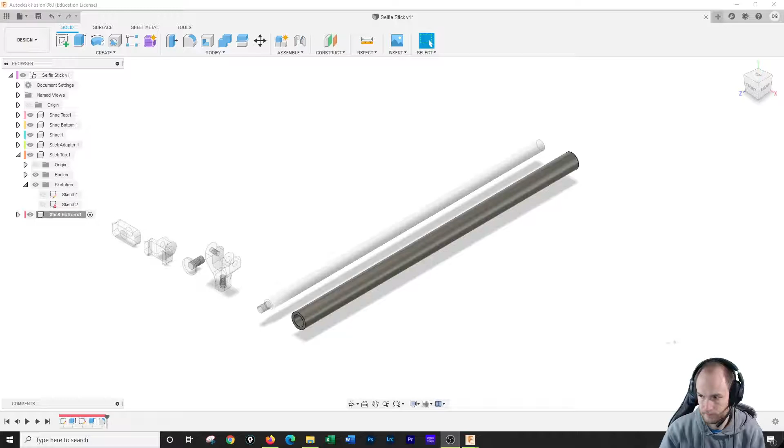Moving down the line, we're going to make the phone holder bottom. We'll make a sketch. So what are we working with here?

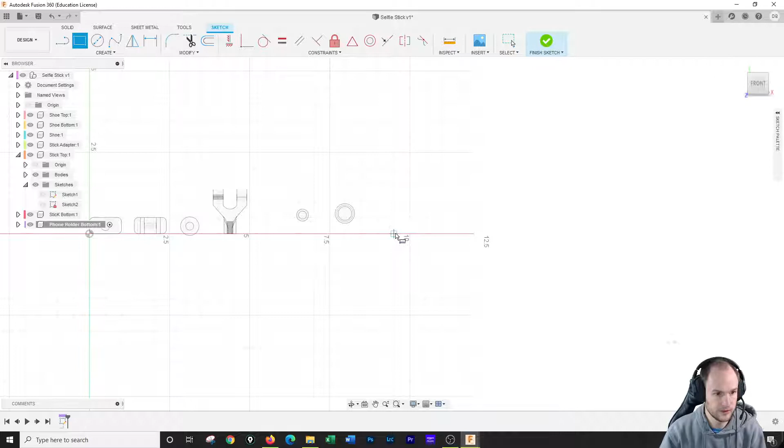So we're gonna make a sketch that is 0.375 by 2. In the plans I had it drawn from the bottom, so it took me a second, and this should be -1. Okay, so that is the first step.

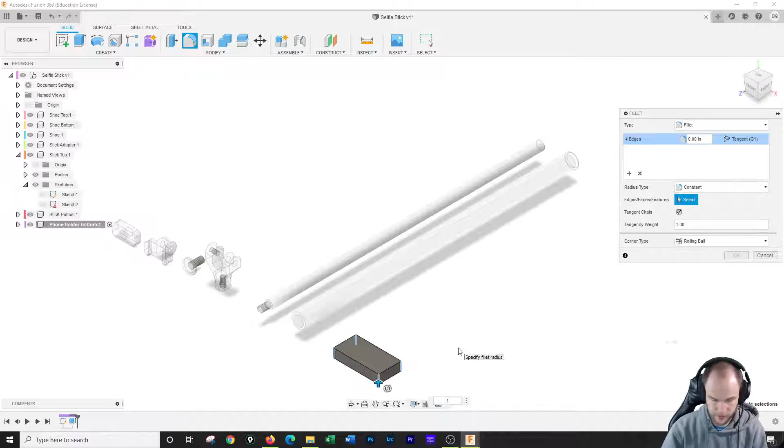I'm gonna throw a quick fillet on these sides here. Whoops, not that side. 1, 2, 3, 4, and it is an 1/8 of an inch fillet, 0.125. Click OK on that.

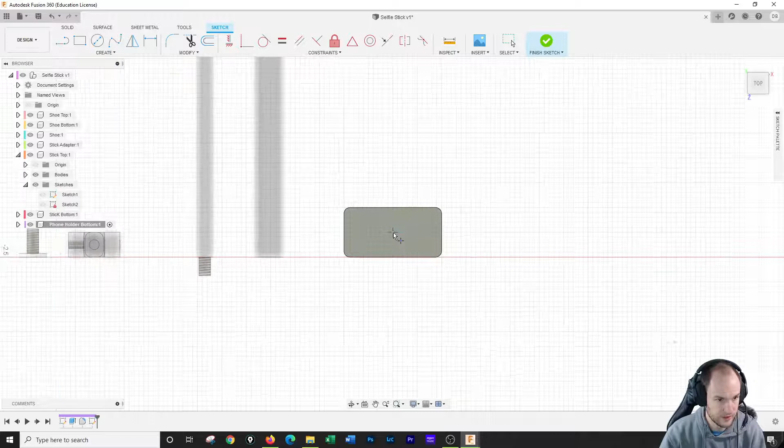I'm going to make a sketch on the top, and in the center of the top I'm going to make a point. So I'm using the lines to line up the center. Found it for me, so you saw that I used this point and that point, the midpoint snaps. So I've got a point in the center, and if there's a point, it means we're probably going to do a hole, so let's do our hole.

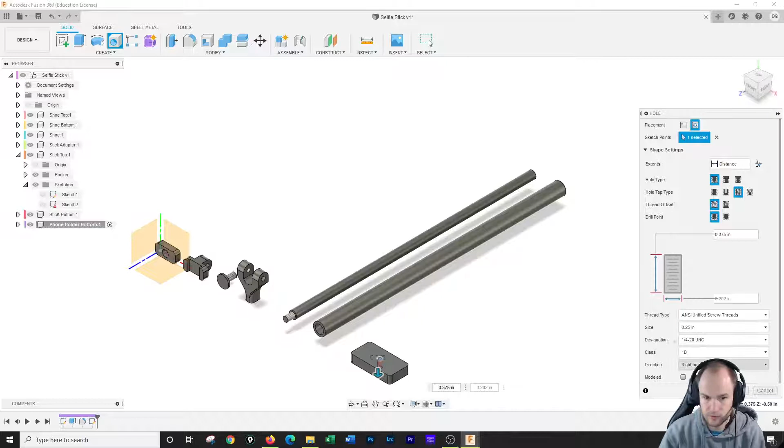And what do we got? Yes, yes, yes, yes. We want this to be at 1/4-20, 1B right hand. Okay, so all that is in order now.

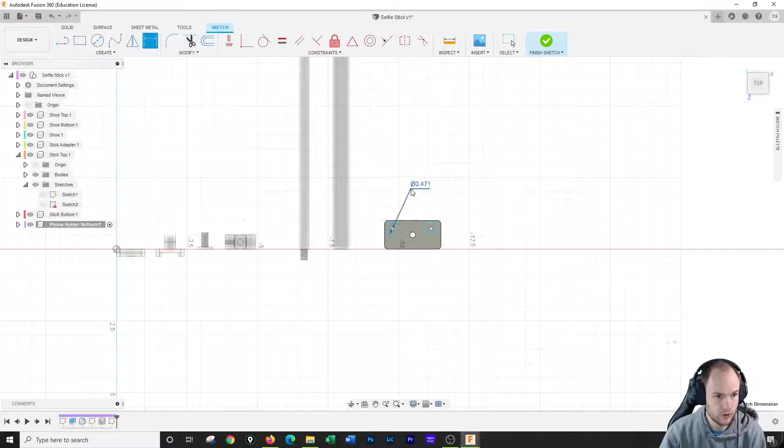And we want to sketch, and we're going to put some holes on the top. Well, circles, not holes. So I'm going to draw a hole here, and I'm going to draw a hole over here. Both of these holes are going to be 1/4 inch, 0.25, and 0.25. Both of these holes will be 0.2 from the top edge, and both of these holes will be

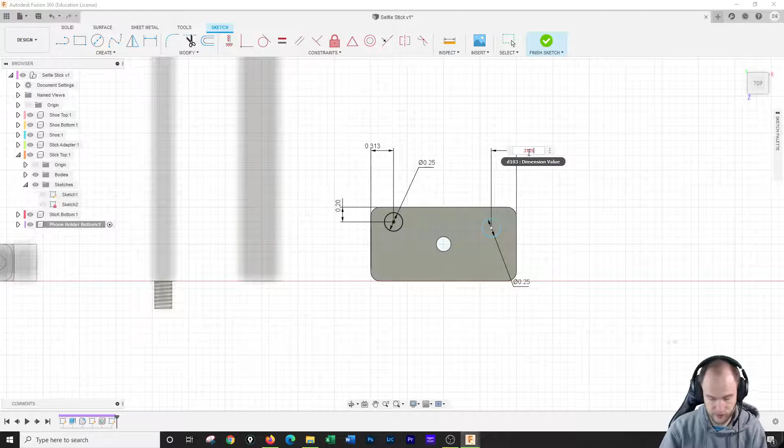0.3125. Apologies, 0.3125. And then on this side it is, once again, 0.3125. So there you go, you can see the dimension by 0.2.

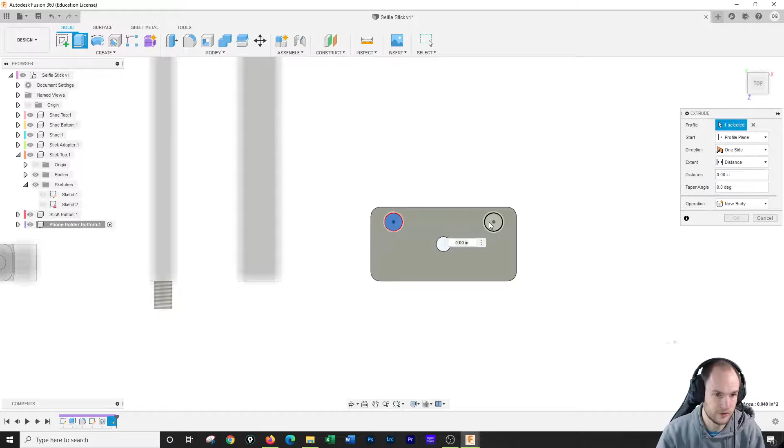Okay, finish the sketch. We're going to extrude those up 2 1/4 inches. So I'm going to select both of these, and they're going to go up 2.25. Let's look at it, 2.25, looking good.

And then we're going to have another sketch on the top face here. Zoom in a little bit. I'm going to make a circle here. I'm going to make a circle. I want to project this geometry. How do I do that?

Project or include. So I want to project that. Okay, so we want to do that. We want to project, so then we can go and grab that center point on there. No guessing involved, all right.

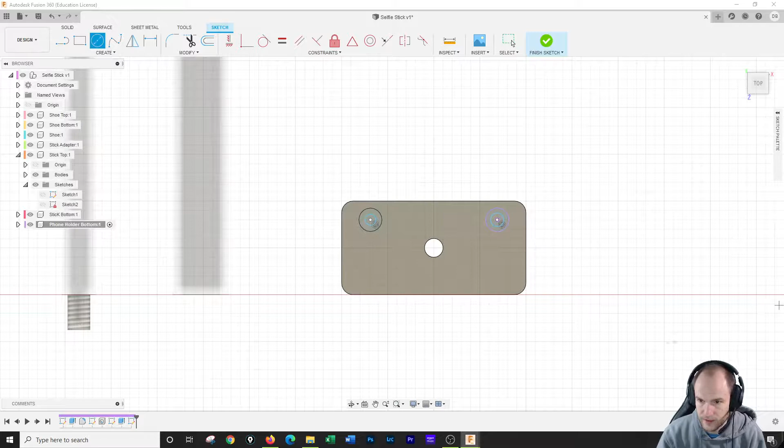And both of these circles are going to be 0.2. So the dimension is 0.2. And I will do the same likewise over here. Whoa, not 0.25, 0.2. Got crazy there.

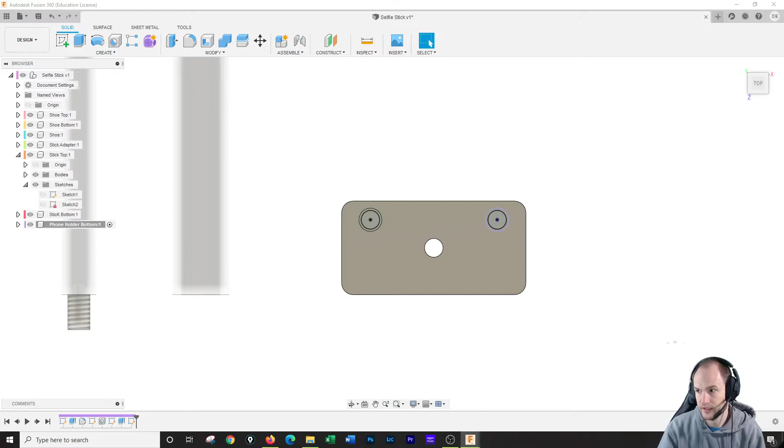I'm going to hit finish sketch, and we're going to extrude these down. Can you guess how far? If you guessed 2 1/4, you were right. So let's go down negative 2.25. All right, so that looks good. And that is the bottom of the phone holder.